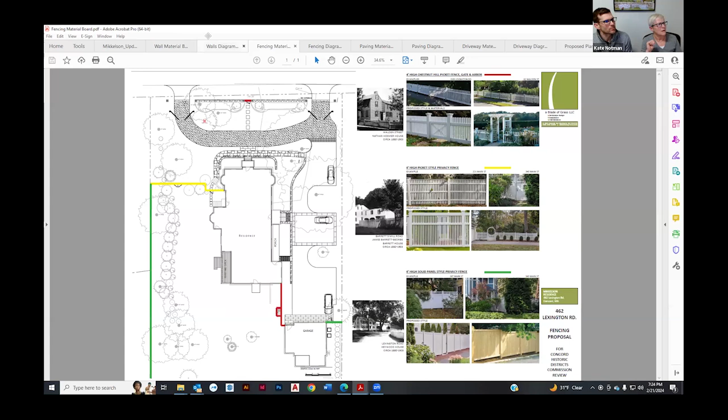We made some edits to make the fence along the side of the property 4-foot high and more open picket, and the fence in the front here to be a 4-foot high Chestnut Hill picket, extending towards the street. We're going to plant to screen that. You'll see a planting plan in a moment.

We edited the fences to make them shorter and more open. A Chestnut Hill picket is a style you see throughout town—this one is on Lexington, this one's on Walden. It's a fence of this style right here.

The privacy picket is a flat slatted picket fence, but there's space between the pickets, so the fence is still somewhat transparent—not fully opaque like a board privacy fence would be.

The yellow one—which fence is the yellow? The yellow would be this fence, a little more opaque than the Chestnut Hill picket, but not by much. There's historic precedent for both types of fences throughout the town.

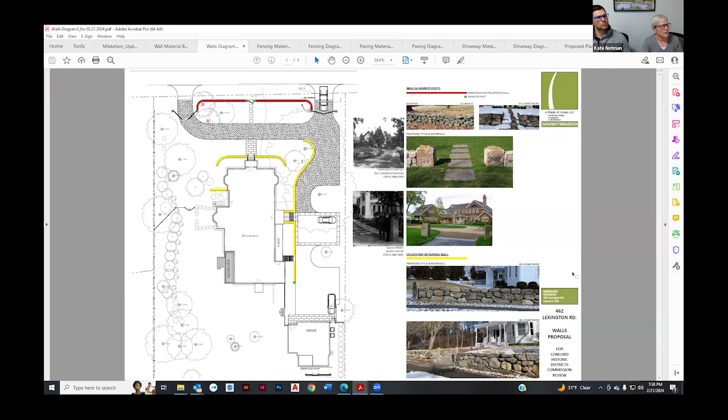Okay, and then the fences are - I think the gates in particular, he was asking about - the driveway gate, 4 foot high. I believe we thought that gate was going to be 4 feet high as well. And are the piers associated with those gates also 4 feet roughly? Yeah, they'd have to be at least 4 feet to hang the gates from them.

And then I think in terms of your comment about moving the strip - the strip is where it was because it was sort of a visual extension of the wall, but it also absolutely could make sense going in between the gate piers. From an aesthetic standpoint, the granite band where it's currently designed allows for more chip seal, more of that small aggregate versus more asphalt. Okay, thank you for your questions.

Walter? The first question I have is, is there a sketch of the view from street level from Lex looking into the front of the property anywhere? Have I missed that? All the questions produced about the height of the wall, the height of the gates, and the height of the plantings would be taken care of very handily by that. You mean an elevation sketch? Exactly.

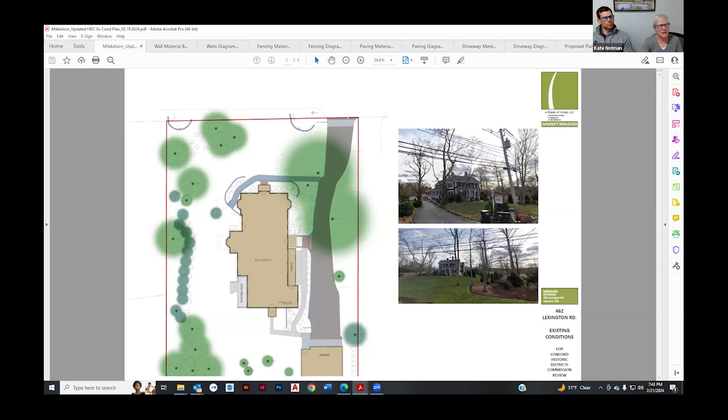Currently it basically starts at the property line and moves into the property from there. What we're proposing would be inbound of the property line, basically where it currently ends. I can simplify my question: if this granite strip as proposed in the overhead view goes into that location, does that mean the currently installed granite strip in its entirety will be removed? Yes, it will take its place. Okay, that was unclear to me.

I'm still wondering about the stone wall in the front too, and certainly not having it be finished granite and all is a big plus. In some ways, the rougher it becomes, the closer it becomes to being a false representation of history there. If it were looking exactly like a witness wall from someplace else that had provided shelter to snipers, I'm not sure that's a good thing to be replicating in a place where it doesn't exist. But I'd like to see again what that looks like in elevation from the front.

And again, we're not trying to recreate history in any way. No, I understand you're not trying to recreate history. I'm just saying that's a potential pitfall, and you may end up doing that inadvertently. In this case, our family is actually Masons, right, so I think we're trying to... Yeah, I understand, I understand.

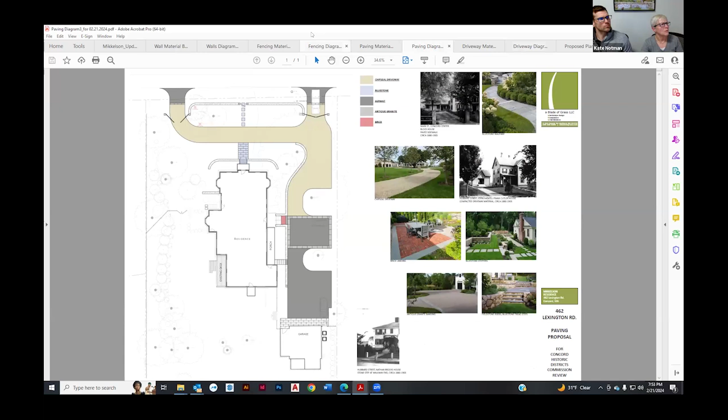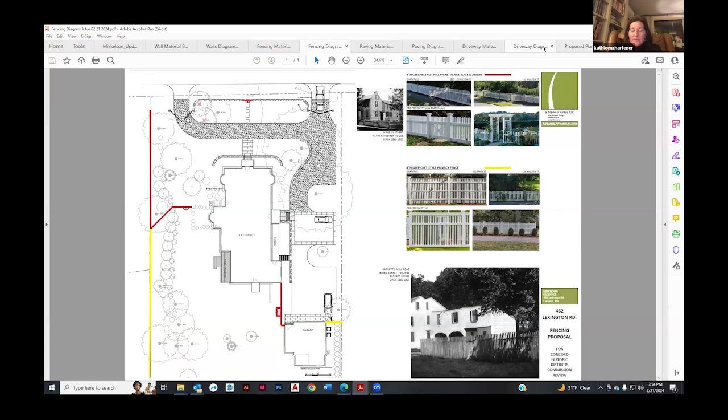Wow. Okay, no, I have no further questions. Thank you. Thank you. Melinda?

I would agree with Walter that we need something—this looking down from above isn't what most people are going to be seeing, unless they're looking at a drone shot someone's taking. We need to see the front and where you think this driveway is going to go, although I suspect there will be no one on our committee who will actually vote to have this driveway extended across the front of the lawn.

I really do think this will—and again, I want to see a picture of the stone wall, to see how much that would really block it from the road, but I can't tell because I can't see it. We were very unified in our decision not to allow the person practically across the street from you to cut a second driveway. Personally, your home is lovely, but I think you'd be making a major—I hate to use the word mistake—but I'm not sure it would be as attractive as it currently is.

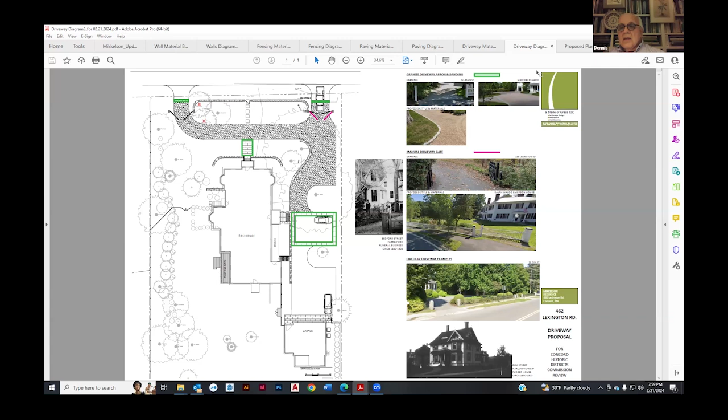Anybody from the public? I don't see a raised hand anywhere. No, okay. Adam, do you have any closing thoughts?

No, I mean, I guess, so we appreciate the input of everyone. I guess, just so we can kind of guide our efforts, I think, ultimately, we don't want to waste anyone's time and want to be mindful of the needs of the town as well as our family. If we were to try to remove that front driveway, that seems to be the most disagreeable piece of it. And just kind of forgo whatever difficulties are of driving, maybe find a way of reworking the inside of the driveway to make it more usable.

Is that a plan that you believe could find consensus? Because I know there's been some people that said, oh, even if you did anything with that front driveway, they wouldn't approve it. Is that the piece in your minds that is the sticking point at this point? And if we could come back with a design that was largely the same without that front driveway, would that be a largely amenable plan?

I think I've heard a number of things. I think removing the driveway would go a long way to getting this approved. But I think there's some questions about the stone walls and how this all works. So I think an elevation is going to be crucial to getting this thing approved, so we get a feeling for the walls and how this all works together, and the plantings work together. I think that's going to be crucial. I'm not taking note here of everything that was said. You probably did, but I think that having an elevation and some measurements, so we see what you're dealing with for the height of the wall and other things, is going to be tremendously helpful in getting this thing approved. Anybody else want to add anything to that?

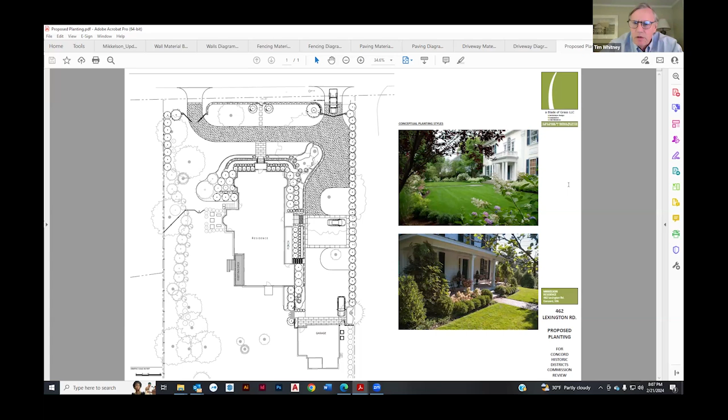Tim, is that you? I can't see you on here. The plans are still up. I'm not appearing for some reason, but yes, that was me. Okay Tim, sorry about that, that was seconded.

Let me go around, start with you Tim, so I don't forget you this time. Your vote on this, to continue. Aye. Walter, aye. Melinda, aye. Kate, aye. And did I miss anybody? No, and I'm an aye.

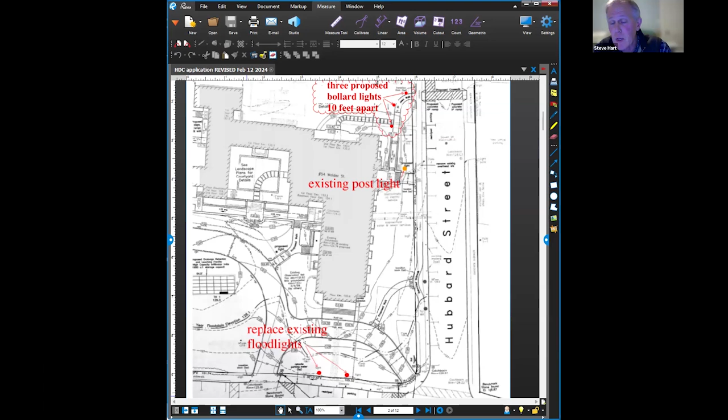The proposed floodlights were similar, slightly fewer lumens and a cooler temperature range. The feedback we received was a concern about the overall brightness and interest in reducing the overall quantity of light. If you recall, we had actually installed one LED fixture and were anticipating installing a second one. As I pointed out at the time, we were not trying to thwart your regulations. We were simply thinking that the best way to evaluate was to see the actual fixture. So that is one part of our proposal.

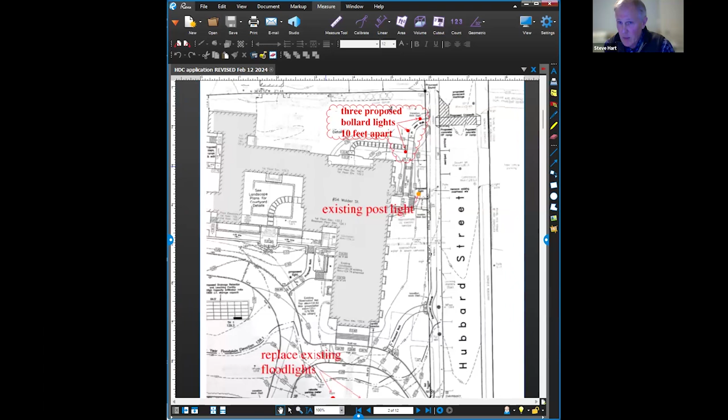The second part of our proposal had been to match the existing post light on the Hubbard Street side with a second post light identical to it. So that's the easy one—we have rescinded that idea and are now proposing three bollard lights 10 feet apart.

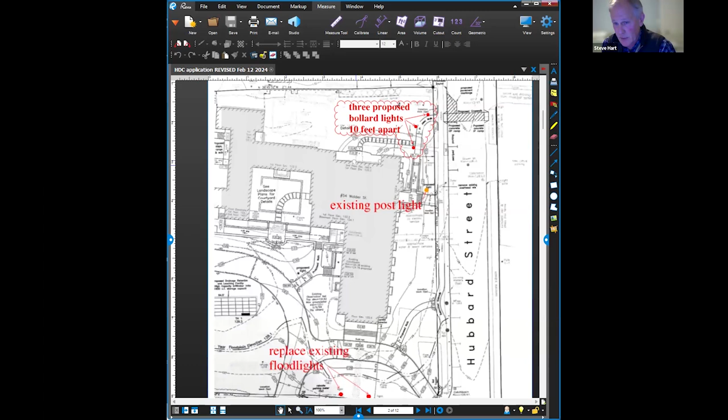There was concern that the post light was altogether too bright, ignored the dark sky requirements, and was inappropriate. So I asked the commission last meeting and received a certain consensus that task lighting that was not historic in nature, but would simply add some safety lighting to that pathway and not create a superabundance of light, was a preferable solution there. As far as the front facade floodlights go, I floated the notion at the last hearing that we could get along with just one light instead of two. The committee I serve on felt otherwise, and we are here to amend that proposal.

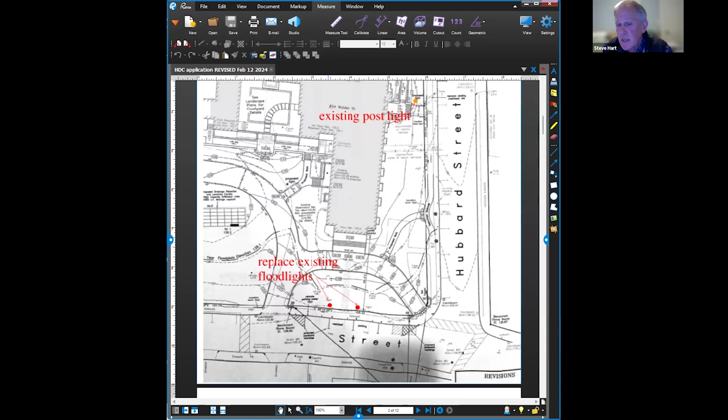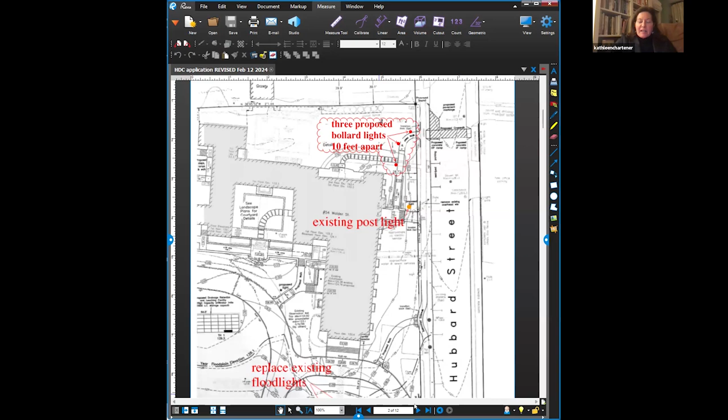Which actually I thought was an enormous amount of light, so I would have a hard time coming around to the additional light to illuminate the entire facade from street to steeple tip, because I also drove around and looked at the other three churches in the near vicinity—First Parish, the Catholic Church, and the Christian Scientist Church. The Catholic Church, right on Monument Square, has a fair amount of illumination, however it doesn't go all the way up its steeple—maybe two thirds to three quarters of that building is illuminated, but not all the way up to its steeple by any measure. It's also painted gray in a number of parts, so that softens the reflection. The other two churches are illuminated from the ceiling down in their porticos and have no additional lighting.

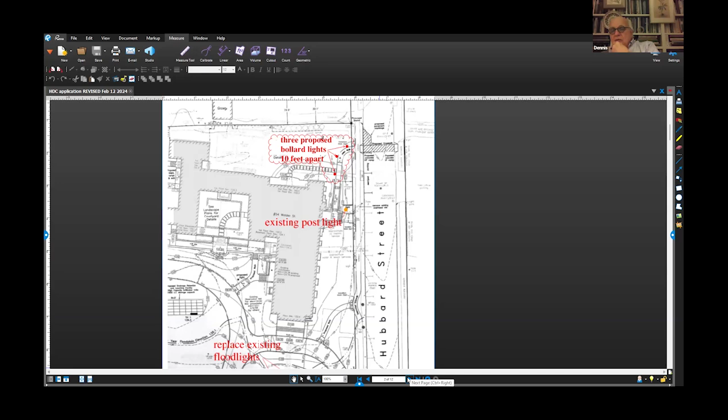So you would approve the bollards and the LED light as it is now, but not the second light. Well, I'm not even wild about the LED light. I think we kind of said it's a lot. Coming off at 10 is helpful because I wondered the same thing. But no, it's a beautiful building and other things are lit there, but a lot of the other houses are kind of on the darker side and are obeying this night sky compliant, dark sky compliant stuff, and it's really bright. I really don't want to be the bad guy on the church, but...

I do have a question, if this can just be a roundhouse. Steve, since you don't own the 78-watt fixture, there's a possibility, other than the fact that it would not have been placed experimentally, of choosing a smaller than 78, though larger potentially than 26, fixture from your supplier, I would imagine. No, if there were a rheostat where you could turn down the 78-watt to 55 watts and go, oh, that still illuminates well enough, it's calmer, that'll make the HDC doubters happier and probably cost less money.

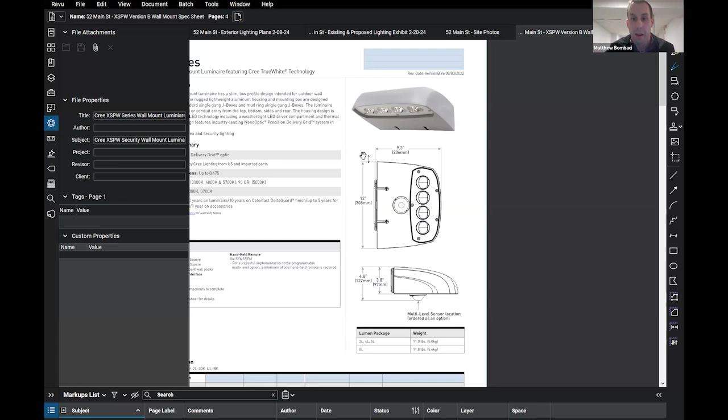So that's that, those are the two comments. I'm hoping those meet what was discussed last time, but I'd be happy to run through any other questions or comments the commission has. Good, thank you. Walter.

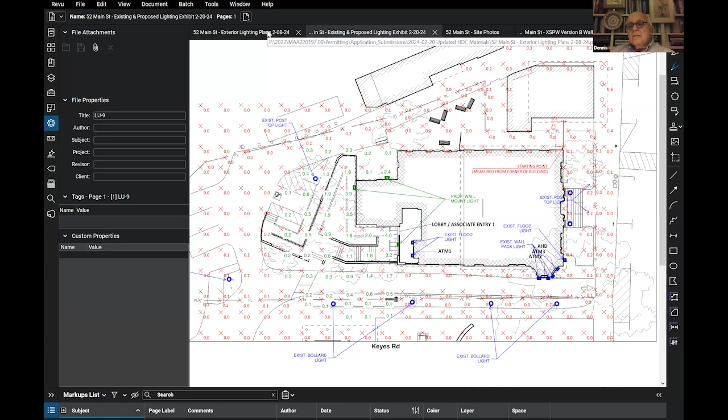The overriding question I have, and I don't have history for this, maybe you do: were these light positions proposed in past applications and rejected for any particular reason? Is there precedent for the commission having said no to them specifically?

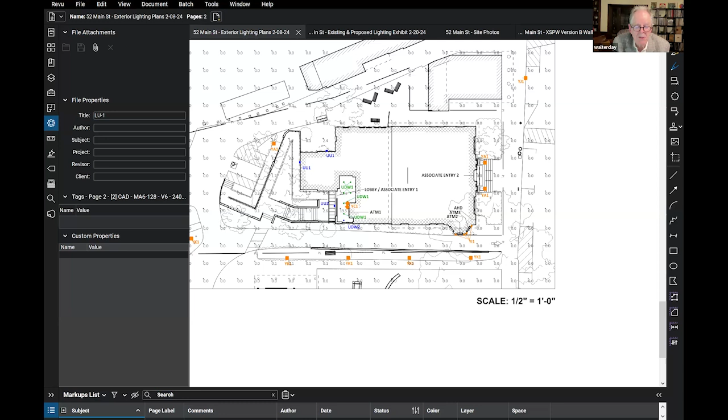I can pull up the previous lighting project from a year ago if that's helpful. That project was much different, it had multiple pole lights and wall pack lights everywhere, probably 20 times or more the lighting that's proposed now. I think that was the reason for the denial.

Remembering the history of this, he's absolutely right, they've pared this way down. I think the positions of the lights are fairly where they were in the original applications, there are just fewer of them. Yes, that's what struck me, just fewer of them. It's certainly a much simpler plan, and the light fixtures are certainly, you can barely see them.

So they don't look Californian at all, do they? No.

Walter, any thoughts? Beyond that, they seem, I'm not sure what their visual impact is off property. That was one of the questions I had last time, when those measurements were made. I'm much happier with this than the California one before. If there's a compelling need or reason shown for them to be in these locations, I'd have a much harder time saying no to this than I did before. But I'd like to hear what other people have to say as well. Thanks, Walter. Tim?

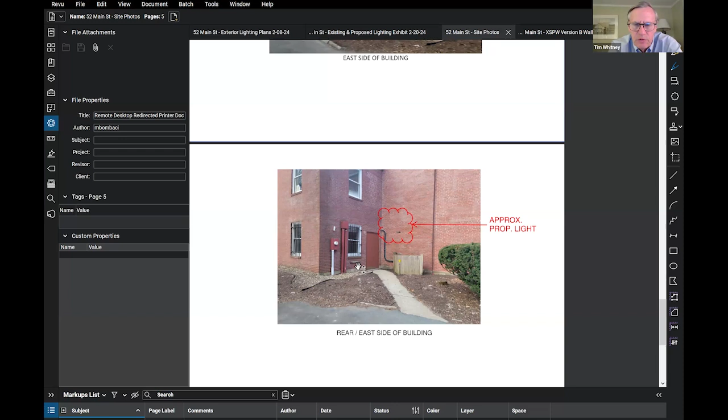Matthew, can you show the photo of the fixture in the alleyway? This is just a detail question, but would it be better if that thing was over the door? If you go back to the site plan, it may be less intrusive to people walking down that nice alleyway past Main Street Cafe, which is quite a lovely little walkway. I'm guessing a bit here as to whether it's better there or over the door, but I'm trying to make these, these are much better fixtures, as least intrusive as possible. I know there's not much spread, it says it's down to 0 foot candles by the time you get to the walkway, but there's still going to be presence. That's the only minor comment I had.

I think this is much better, thanks, quick question I guess. Great, Kate?

You're muted. How's that? Okay, yep, there you go, you're back.

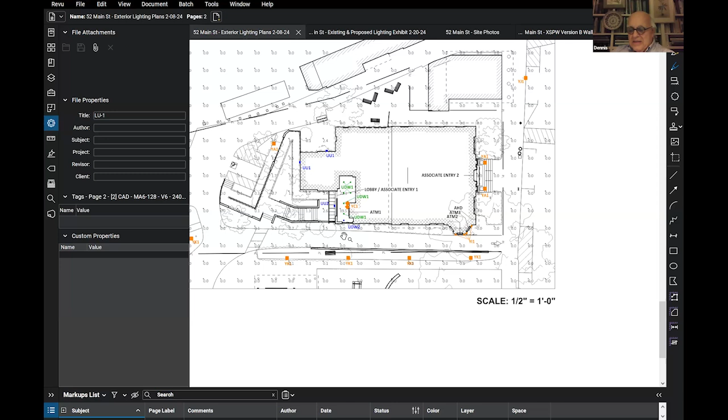Let me go around: Walter, aye. Tim, aye. Melinda, aye. Kate, aye. And I'm an aye. Thank you very much, thanks everybody, have a great evening.

Okay, so we are done with the public hearings, I think, Ann, is that true? I think so at this point.

So the other business, I have some comments to make, but let me make those at the end, and let me move to the library's potential installation of a sundial. I saw Sherry there someplace. Sherry, are you making a presentation for the library?

You're muted. Yes, there... actually, no, you can see I'm in the library.

William Andrews, who's here, is the artist, and he's the one who's actually going to give the presentation. Brian Rossborough has also been working with him on the concept and the possibility. Just to clarify, this is an informal discussion, but the application wouldn't be submitted by the library per se. It's a project being done by an independent group, and they've spoken to us about the library as being a good location. The Library Corporation is supportive of the concept and the location. We want to start some informal discussion about the possibility, but money would have to be raised by an independent group, not the library, for it to happen.

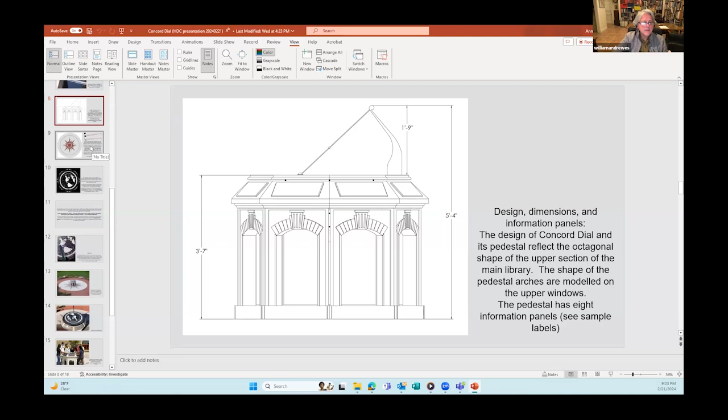So West Concord Station, the house where Henry David Thoreau died. We've had some assistance on where these places should be from Bob Fardy, who taught in the school system a very long time, and also from Bob Gross, who many of you would have heard of. They've been advising us, Brian and me, on what the best directional arrows might be.